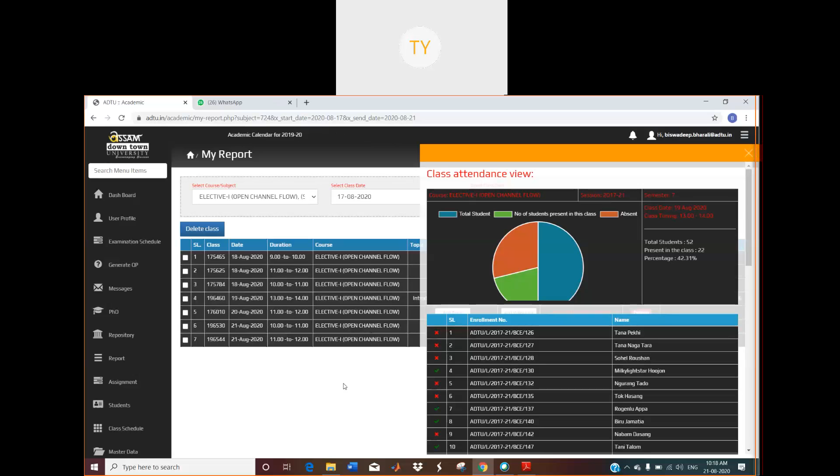Actually we have already informed about this issue, you are unable to give rating, so let's see how they solve it. But in my ERP, it seems like total students is 52, present in class is 22.

I think that roll number 81, her registration is not done, so that's why it's not showing. I think that problem is also being worked on, so it may be clarified today about roll number 81. So actually present in the class is 23, not 22. Roll number 81 is not in the list, so that is why we couldn't mark present that roll number 81, because it's not there in this list. So that's why present in the class shows 22.

We have already informed the IT department about your issue. Let's see how they solve this problem. Okay, okay.

So your problem is you are unable to rate the class, right? Yes sir, yesterday I rated it, and the one I did is also gone now. Okay, let's see.

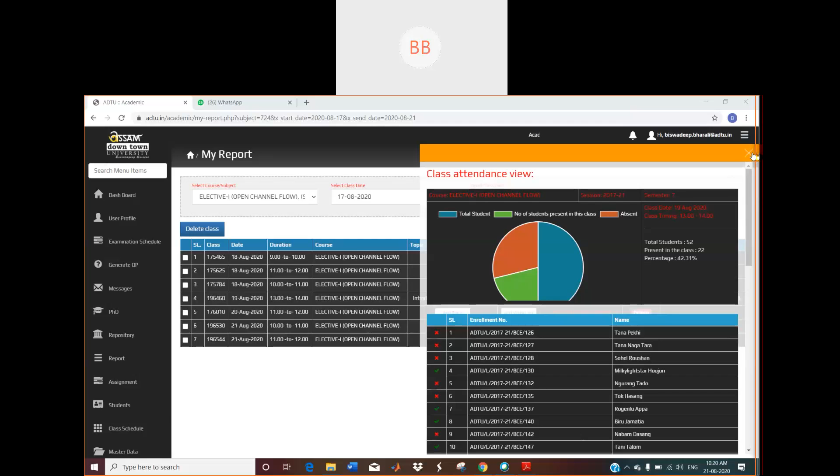Sir, there's just one more doubt. In that YouTube channel, it's not given the time duration till which we can wait, sir. Your voice is repeating and not coming through properly. See, your voice is not coming properly, sir.

But then the other teachers are saying that only 48 hours for rating, so which one is true, sir? No, no, I think it's 72 hours for students, and 48 hours for faculty to upload. Those things we have already informed the IT department, maybe some technical issue, I guess, so it will be sorted out very soon.

Don't worry, and we also clarify about this thing: when we need to upload, because my link is open for 48 hours. Then for your side, I don't know, I need to ask that.

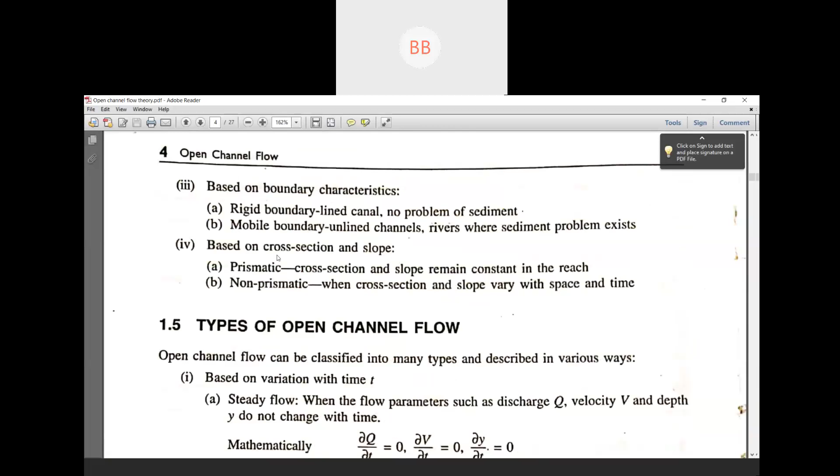I think we were about to discuss about types of flow in the last class. Then our meeting ended, so we will start from here in today's class. In our previous section, we discussed about types of open channel. This is types of open channel, and now we are discussing the different types of open channel flow.

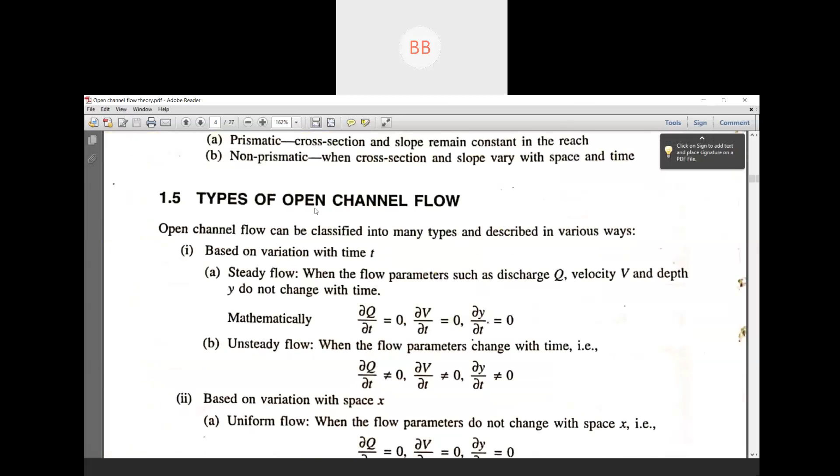So here we have steady flow. These things you have already studied in third semester, but still I'll give you an overview. See, suppose this is a river flowing from upstream to the downstream. Suppose this is your upstream, and this is your downstream.

Yesterday in last class I said our natural river is a non-prismatic channel. As you see in this diagram, the width of the river is less here and more there, so it's not uniform. That's why we consider our natural river as a non-prismatic channel.

So now what is steady flow? Suppose you consider this as a top view. Here the RL is higher than here, okay, so that's why the water is flowing in this direction.

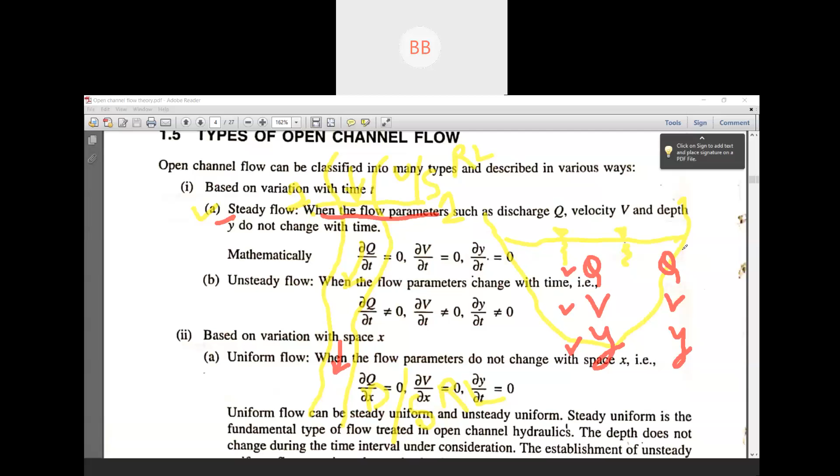Then again after 1 hour, again at the same point or same section, we are going to measure discharge, velocity, and depth of flow. If both the flow parameters - discharge, velocity, and y - are similar or same, then we can say that flow is a steady flow.

That means if the discharge before 1 hour and after 1 hour is the same, and the velocity is also same, and the depth of flow is also same, then we can say the flow is steady flow. That means with respect to time, our flow parameters remain constant - not changing, but at the particular section.

So here it's written: when the flow parameters such as discharge, velocity, and depth do not change with time, that flow is called steady flow.

Initially, at 0 time, we have measured discharge, velocity, and depth of flow. And after 1 hour - see, 1 hour is not the standard time, I just take any random value. It may be 15 minutes, half an hour, or one day. It depends; the time interval depends. But the thing is that after some time, if the discharge remains same, or velocity remains same, or depth of flow remains same, then we can say the flow in that open channel is a steady flow.

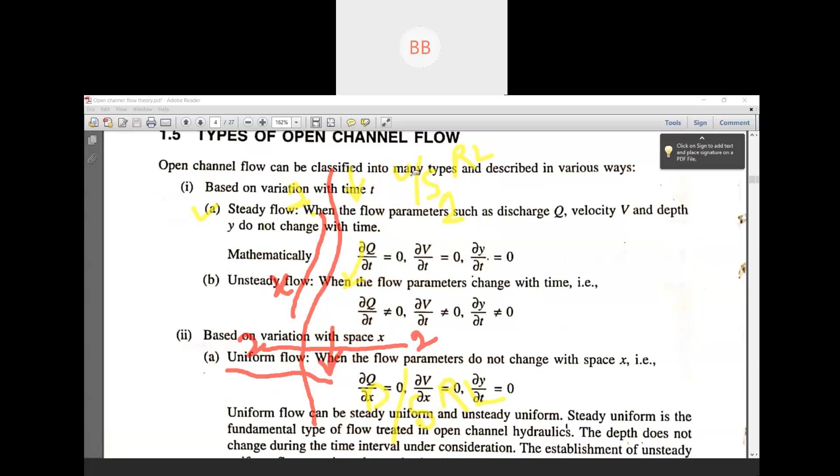And similarly for uniform flow, if you measure the discharge velocity and depth of flow at section 1, and then you travel some distance and consider another section 2, and measure those parameters again for section 2, and if those parameters are same, then you can say the flow in the river is uniform flow. Or if those parameters are not same, then we can say the flow in that particular channel is non-uniform flow.

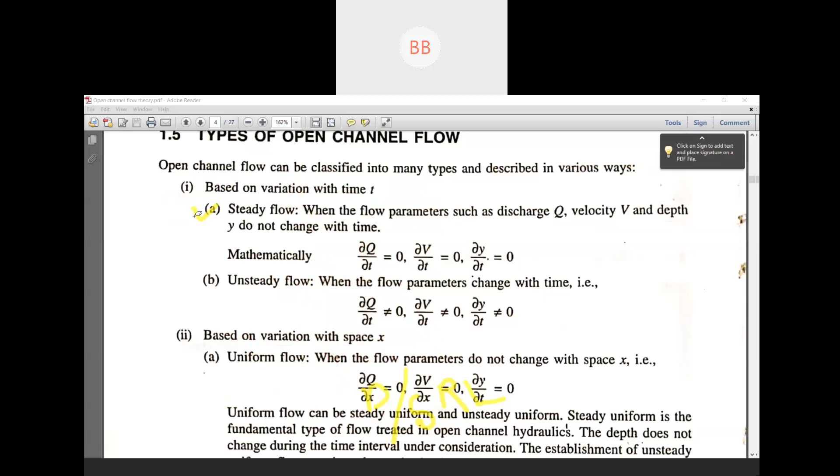Then again, when we are discussing non-uniform flow, non-uniform flow is again divided into rapidly varied flow (RVF), gradually varied flow, and spatially varied flow. So now we are going to discuss what is gradually varied flow, what is rapidly varied flow, and what is spatially varied flow.

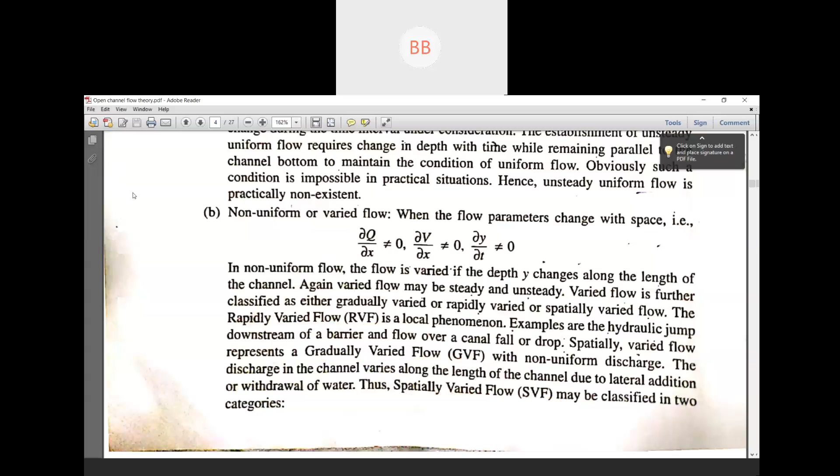See, this is your uniform flow. If you see the first figure, this flow is constant. Suppose we have taken one section here, and we calculated the depth of flow y1, we found it at 2 meters, suppose. Then we travel some distance, this is x, say about 100 meters, in the same channel, this is the bottom of the channel. Then we consider another section 2, and we measure y2 value here, and if it is same as 2 meters, then we can say this is uniform flow. That's why it's written its depth of flow is constant.

The next one after uniform flow is our gradually varied flow. If you recall, we have a laboratory video on our YouTube channel where, in the lab, we tried to create a gradually varied flow and a rapidly varied flow. So what is gradually varied flow?

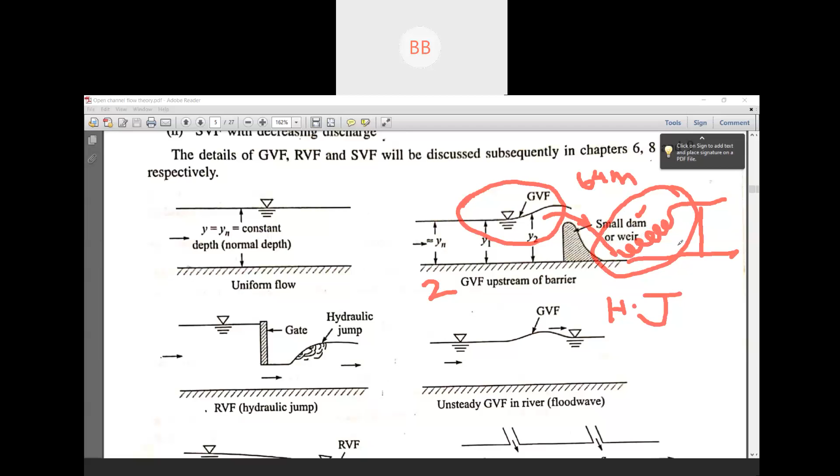We have installed them and measured the values, how the GVF is varying, and then how in the downstream we can observe this hydraulic jump in the same channel. That channel is our rectangular channel, and the length of the channel is about 6 meters, in our hydraulics lab.

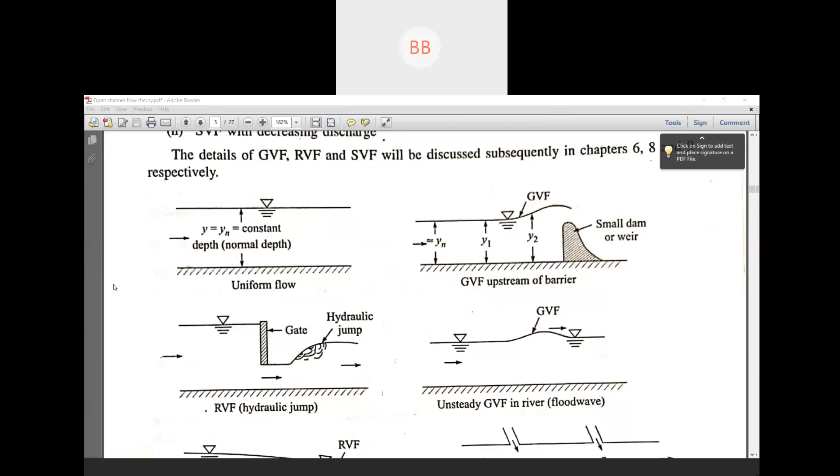You kindly go through those videos for clear explanation. It will be much clearer to you when you watch those videos. So those are examples of your...

Again, if you see in figure 3, this is your sluice gate. See, when it is closed, this head is very high. If you consider this head is very high, this is the head of water.

As soon as you open it, there is a jump you can observe. Jump is nothing but a sudden change of depth of flow. See, as soon as you open the gate, the water is flowing at a very high velocity. Once it's coming out, it got the space to increase its depth.

Here, what happened? You have the sluice gate. As soon as it comes out, it got the space to increase its height. So if you see this phenomenon in the irrigation system, we have a sluice gate. Once we open the sluice gate, this phenomenon can be observed.

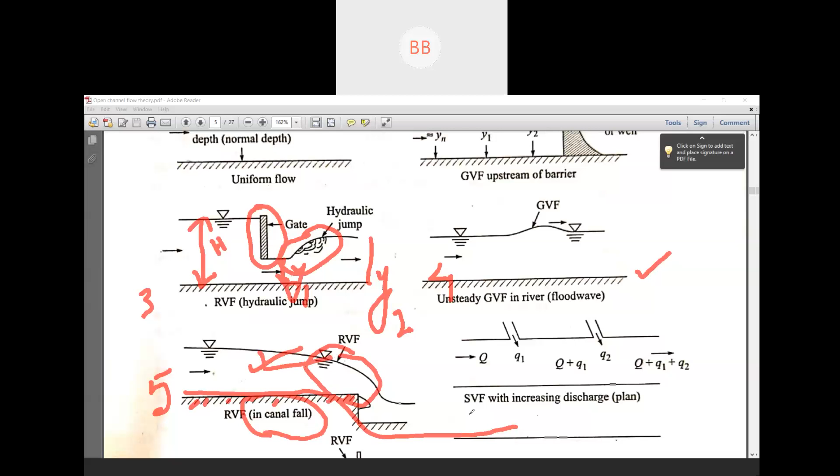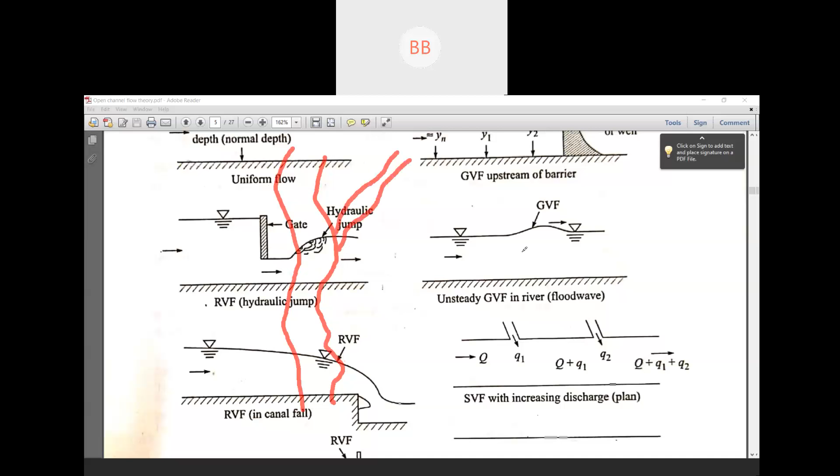Next is spatially varied flow. This is nothing but, we all know, when we consider a river, there are some tributaries, or... let me see if I have a clear picture of tributaries, then it will be much clearer.

This is spatially varied flow, or in reverse way it may decrease also. Say initially you have Q, then Q1 is going out, so what will be discharge left out? Q minus Q1. Then again you have a discharge of Q2 going out of the river, so the remaining discharge is Q minus Q1 minus Q2, and so on. So these two are called spatially varied flow with increasing discharge when lateral inflow is coming in, and decreasing discharge when it's going out.

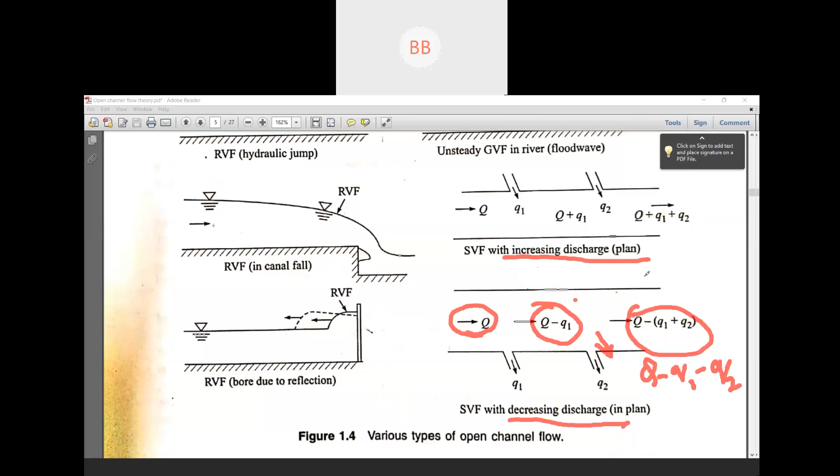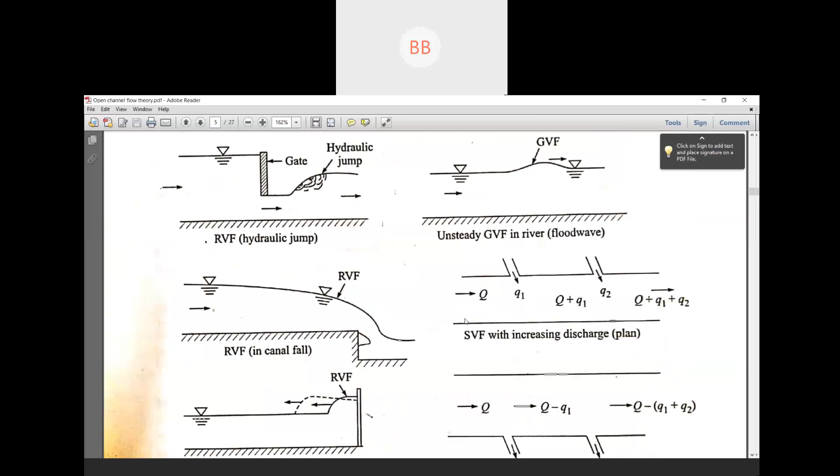Is this subject interesting, or nothing is interesting related to civil? Yes sir. It's revision for online, mostly a little bit difficult modules. So you people, if you understand - if you know what is steady flow, you need not learn or memorize it, you can write it on your own. That's what in the very beginning class I asked you, just to understand what is going on, how it's happening. You can easily relate it with other things and write it on your own once you understand. Not that much difficult.